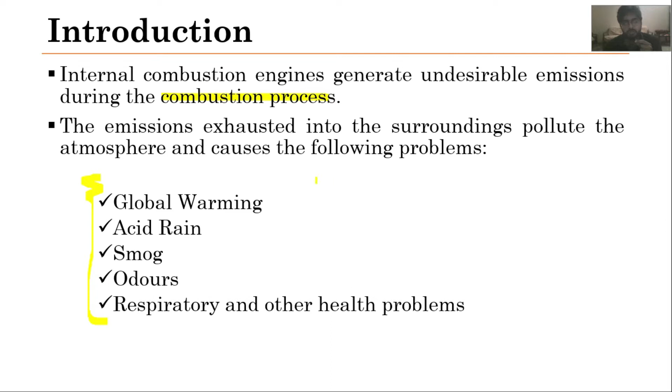So in the last video, we studied why these emissions are being produced, and that they result from the combustion process and are then exhausted into the atmosphere, which pollutes our environment. We also discussed some of the causes and effects of these exhaust gases, and some major causes of these emissions, such as non-stoichiometric combustion and dissociation of nitrogen, as well as impurities in the fuel and air.

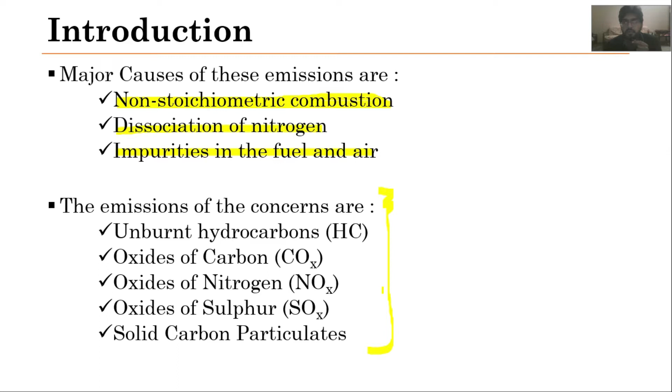After that, we studied what type of emissions basically occur during the combustion process. Then we also discussed what we should do regarding the control of such emissions. We discussed that either we after-treat our exhaust gases, or we reduce the generation of emissions in the cylinder.

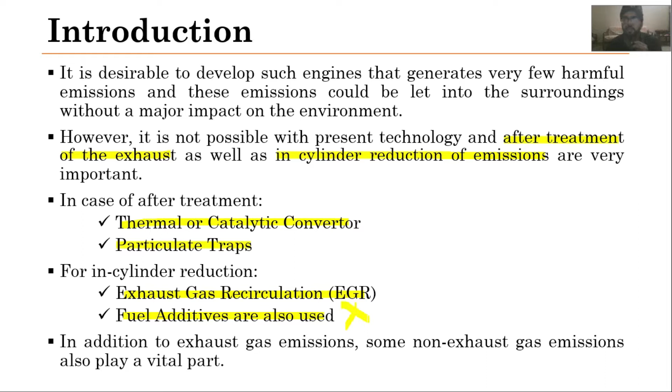We also discussed that for after-treatment we can use thermal and catalytic converters and particulate traps, and for in-cylinder reduction of emissions we can use an exhaust gas recirculation system, along with some fuel additives for that purpose. I also mentioned that we are not concerned with the fuel additives employed to reduce the generation of emissions. Then we discussed some of the basic history of air pollution due to the IC engine.

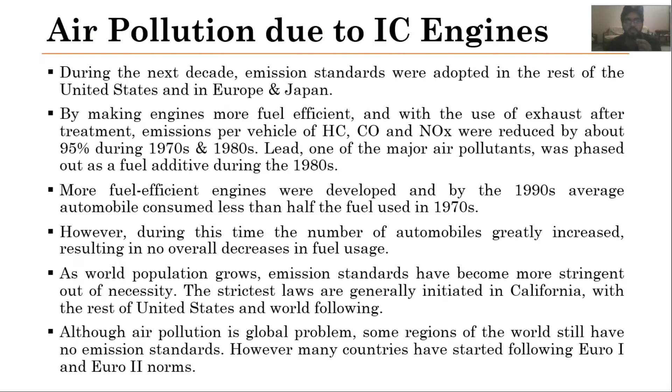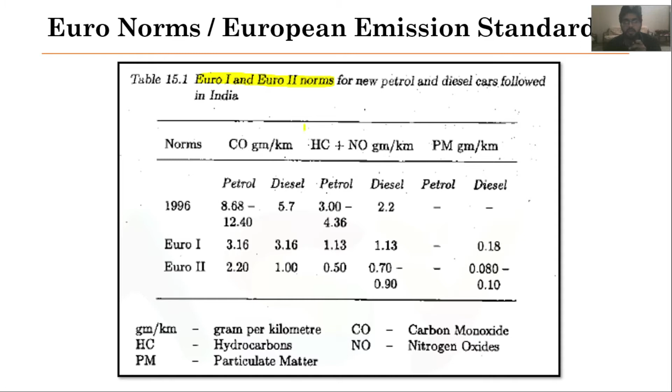After that, we also discussed the Euro norms and European standards, and went through the Euro 1 and Euro 2 norm graphs.

After that we discussed the classifications of engine emissions, and we classified our emissions into two categories: first is exhaust emission, and second is non-exhaust emission. Exhaust emissions are those like unburned hydrocarbon, oxides of carbon, sulfur and nitrogen, and some particulate, soot and smoke, while non-exhaust emissions are like fuel tank, carburetor, and crankcase blow-by losses.

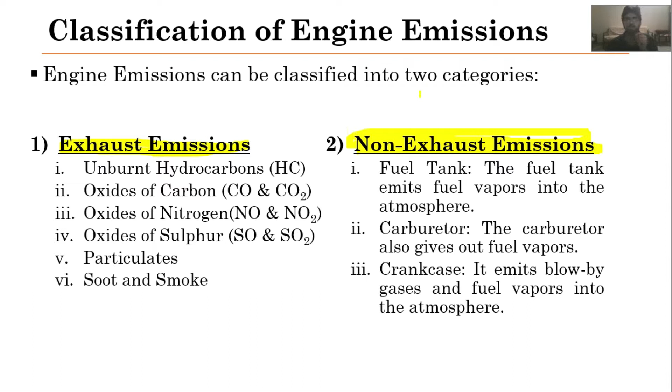Then we briefly discussed a graph between the equivalence ratio, the fuel-air equivalence ratio, and the amount of emissions produced during the combustion process. This graph is basically for the SI engine.

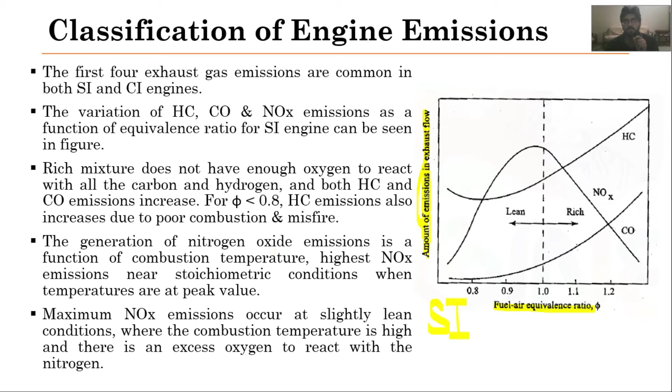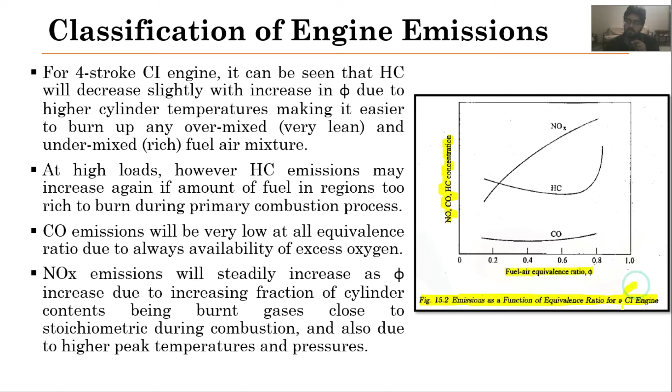Then at the end of the previous video, we discussed in quite some detail some of the causes because of which hydrocarbon emissions are generated in SI engines, and these causes were incomplete combustion, crevice volumes, leakage past the exhaust valve, valve overlap, and deposits on walls. At the end we also discussed oil on the combustion chamber walls. We discussed these causes quite briefly in the last video.

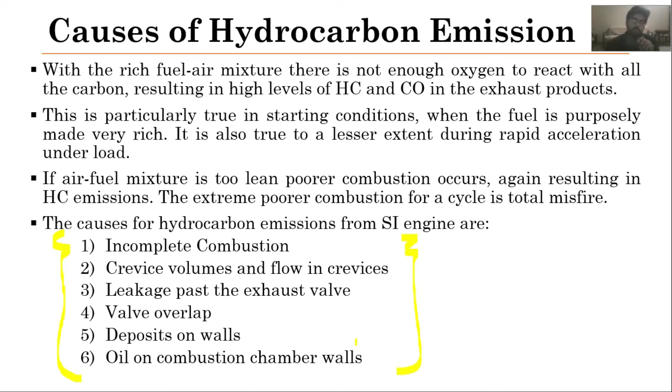So now moving forward towards today's topic, we will start off with hydrocarbon emission, with the causes of hydrocarbon emission, but this time in a two-stroke engine.

As I discussed earlier, in a two-stroke engine scavenging is done with the help of the deflectors present on the crown of the piston. During the scavenging process, when the fresh air-fuel mixture comes into the combustion chamber, it pushes the exhaust gases towards the exhaust port and pushes those gases out. Not only that, but during this process some of the fresh air-fuel mixture also goes out through this exhaust port, and this is a pure loss of hydrocarbons.

Such is one of the main reasons hydrocarbon emissions in two-stroke engines occur. The intake air-fuel mixture is used to push the exhaust residual out of the open exhaust port, which is called scavenging. So when this is done, some of the fresh air-fuel mixture along with the exhaust gases is expelled out of the cylinder before the exhaust port closes. This is the major source of hydrocarbon emissions in the exhaust.

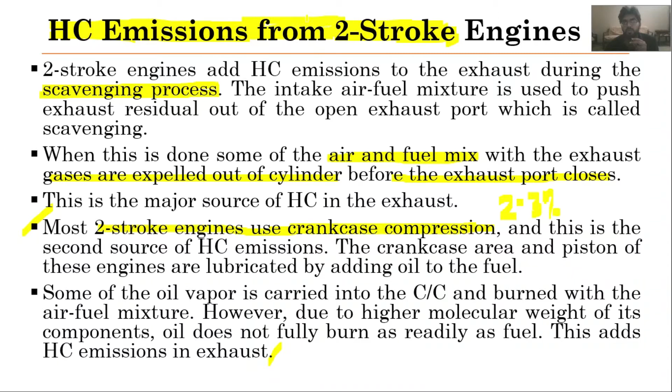Next we have the hydrocarbon emissions in CI engines. In the last video we started off with hydrocarbon emissions in SI engines, then today we discussed hydrocarbon emissions in two-stroke engines. Now we will start off with hydrocarbon emissions in CI engines.

In CI engines, we only send air in the intake during the intake process, and because of that, only intake air is being compressed. Since only intake air is compressed, high compression ratios are used in CI engines. When the fuel is injected, we usually have a very lean air fuel equivalence ratio, and because of this lean equivalence ratio, the production of hydrocarbon emissions is almost 1/5 of the emissions produced in an SI engine, because in SI engines the air fuel mixture is sent into the combustion chamber for compression.

The components in diesel fuel have higher molecular weights compared to gasoline, and this results in higher boiling and condensing temperatures as well. Because of these higher condensing temperatures, soot formation is more in CI engines.

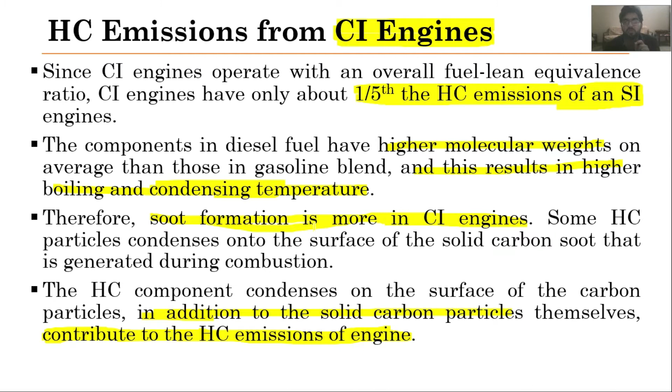So soot formation is not only the formation of carbon as a pollutant itself, but it is also contributing to hydrocarbon emissions as well. This is what usually happens in CI engines. Moreover, CI engines usually have combustion efficiencies of about 98%, meaning only 2% of the hydrocarbon fuel is emitted, which is quite low.

So it is important that injectors are constructed in such a way that the injection stops such that there is no dribbling, as we discussed in the chapter on mechanical injection systems—that there should be no dribbling in the fuel injection nozzles.

However, some amount of liquid fuel usually traps inside the tip of the nozzle, and when the piston is moving downward and a suction pressure is generated inside the combustion chamber, that fuel from the nozzle is driven into the combustion chamber, which causes an increase in hydrocarbon emissions. That volume of fuel is called sac volume—the amount of fuel present after fuel injection, trapped inside the fuel nozzle tip. It is a very small amount, but it increases hydrocarbon emissions.

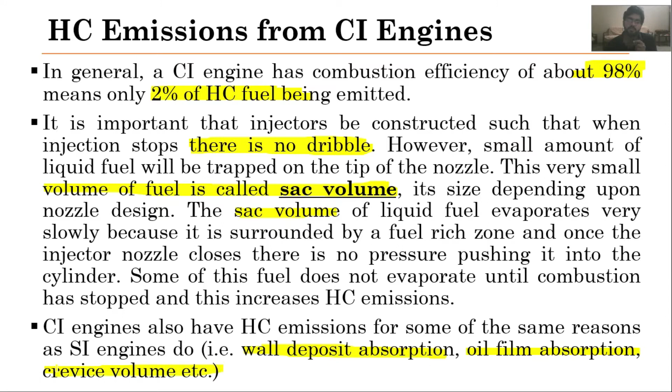Now moving forward, we will discuss some of the types of emissions which are being generated, starting off with the formation of carbon monoxide.

Carbon monoxide is basically a colorless and odorless gas, but it is poisonous. If a human being inhales it, it will react with the oxygen taken in during respiration, and it will not allow the necessary reactions required inside our body, because that oxygen is being consumed by carbon monoxide. So it is quite harmful from the human health point of view.

Typically, emissions of an SI engine consist of 0.2 to 5% carbon monoxide. So it is an undesirable emission, and we do not want this. Not only is it undesirable, it is also a loss of chemical energy, because we can convert this carbon monoxide into carbon dioxide and get heat which can be utilized in doing some useful work. So it is also a loss of energy.

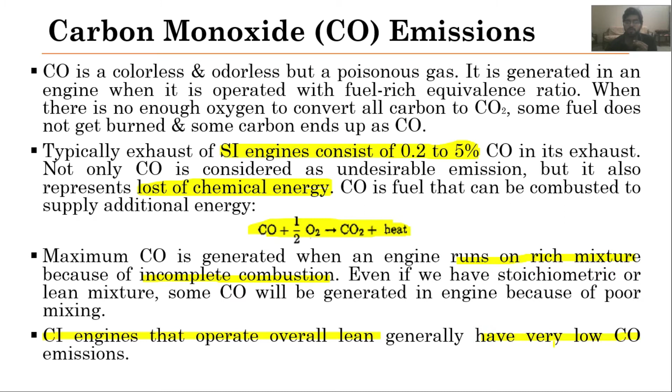Since CI engines usually operate in overall lean conditions, they have very low carbon monoxide emissions.

Now when we talk about nitrogen oxide emissions, as I mentioned earlier, nitrogen oxide emissions occur when we achieve the maximum flame temperature, when the cylinder temperatures are quite high. An exhaust gas of an engine can have up to about 2000 ppm of nitrogen oxides, most of that being nitrogen monoxide, but there can be some amount of nitrogen dioxide as well.

So NOx emissions are basically undesirable, and as I mentioned earlier, they can cause acidic rain. Not only that, but they can lead to the formation of smog and will lead to damage of the ozone layer as well.

At low temperatures, atmospheric nitrogen exists as a stable N2 molecule, and it will not form nitrogen oxides. But when we have very high temperatures inside the cylinder, this nitrogen molecule will break and oxides will be formed. So these pollutants are completely undesirable.

The highest concentration of nitrogen oxide is around the spark plug, where we usually have the highest temperature. And if we have the spark timing advanced, the cylinder temperatures will increase and more NOx will be produced.

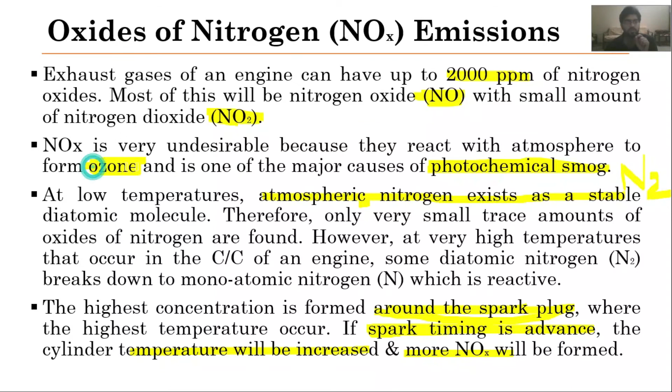Next we have photochemical smog. As I mentioned earlier, I will explain the formation of photochemical smog and how nitrogen basically affects the ozone layer. I will discuss this later.

So now I am going to start off that part - what happens in photochemical smog is that when sunlight, rays from sunlight, attack this nitrogen dioxide molecule, it provides the necessary activation energy to remove this monoatomic oxygen, and nitrogen oxide and smog will be produced.

And this monoatomic oxygen will react with oxygen molecules and it will produce ozone, it will form ozone.

Humans basically cannot survive, cannot inhale ozone, because it is a harmful gas at ground level and it can damage our biological tissues. Not only from the human's point of view, but it is also harmful for plants and trees as well. So we do not want the formation of ozone at ground level, but nitrogen dioxide causes the formation of ozone.

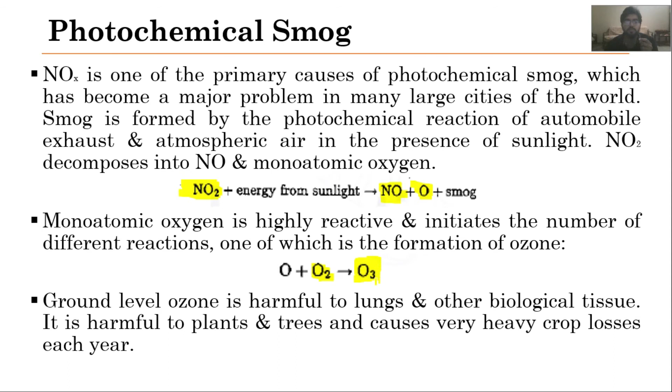Now moving forward, we have particulates. As I mentioned earlier, particulates are not a main pollutant in the SI engine, but in CI engines, since the exhaust of CI engine contains solid carbon soot particles which are generated particularly where we have a rich air fuel mixture zone.

Some of those particles are released into the atmosphere during the exhaust process, and they are undesirable and odorous pollutants. So maximum density of particulate emissions occur when fuel is injected to the maximum power, meaning we have a rich air fuel mixture or poor fuel economy. So soot particles are usually in the form of a cluster of solid carbon spheres.

These spheres usually have diameters ranging from 9 to 90, but most of them are within the range of 15 to 30. The spheres are solid carbons with hydrocarbons and traces of other components absorbed by the surfaces, meaning it will not only be the carbon, but it also contains some hydrocarbons with it, because the soot formation, the particulates which are being deposited on the wall, have absorbed some amount of the hydrocarbons.

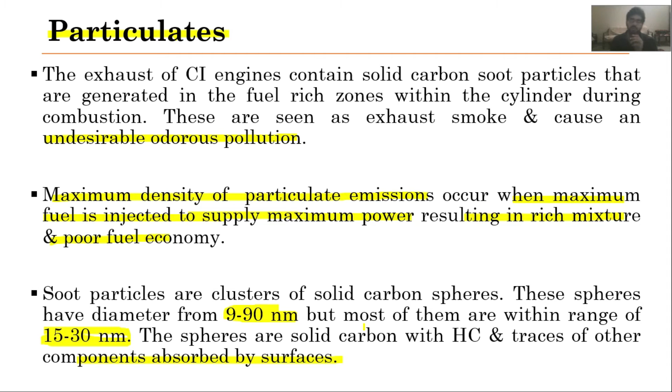Now next we have the formation of aldehydes. Aldehydes are the major emission problem particularly when we are talking about alcohol fuels. The formation of aldehydes is completely undesirable because it is an eye and respiratory irritant. This is a product of incomplete combustion, meaning when incomplete combustion in alcohols occurs, aldehydes are formed, and this is one of the major problems with the usage of alcohols as a fuel.

But since alcohols are not being used in that much amount as petrol or gasoline has been used, therefore such emissions are not a problem for now at least, but in future it may be a problem.

Now next we have lead. Long before, as I mentioned, a component known as tetraethyl lead was used for the increment of the octane number of the fuel, and this led to the release of lead into the atmosphere when combustion occurs.

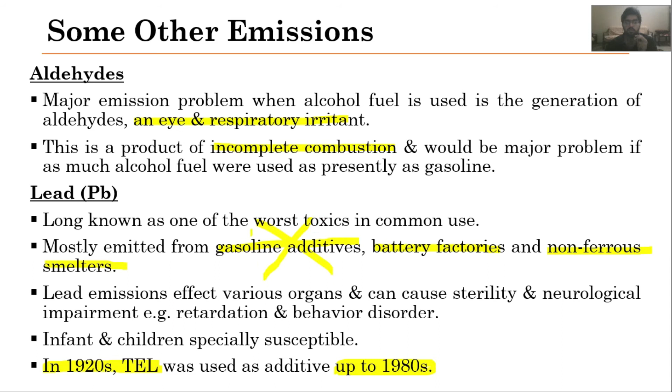Mostly emitted from gasoline additives, battery factories, and non-ferrous smelters. Now this has been removed because in gasoline it is not being used as an additive now.

So now moving forward, next we have the formation of sulfur oxides. As I mentioned earlier, the formation of sulfur oxide is one of the major reasons for acid rain, and gasoline contains about 150 to 550 ppm of sulfur by weight, but diesel fuel can contain up to

5500 ppm by weight. But in some developed countries this has been reduced to a tenth of this value, meaning only 550 ppm or maybe 300-400 ppm are being allowed.

So what happens at higher temperatures, sulfur combines with hydrogen as well, and it produces hydrogen sulfide. Again, this is a toxic gas, and when oxygen combines with sulfur, it produces sulfur dioxide.

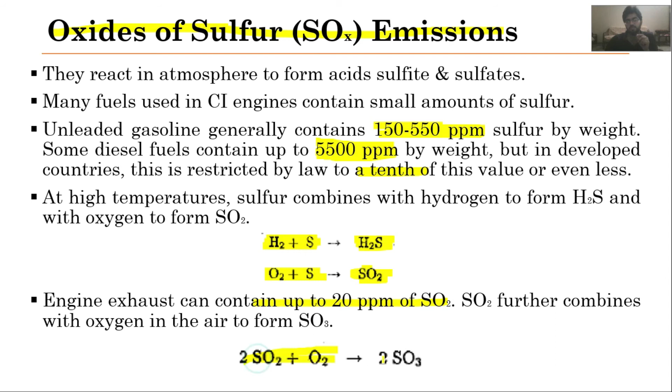Again, this causes the formation of acid rain. Now an engine exhaust can contain up to 20 ppm of sulfur dioxide, which then combines with oxygen to form sulfur trioxide, and when sulfur trioxide and sulfur dioxide combine with water vapors, sulfur trioxide forms sulfuric acid and causes acid rain.

And when sulfur dioxide combines, it produces sulfurous acid, and this is also another reason for acid rain as well. So sulfur is basically the main threat here, and a lot of work has been done recently to minimize the amount of sulfur from the fuel.

So in many countries, laws restricting the amount of sulfur allowed in the fuel are continuously being made more stringent. During the 1990s, the developed countries reduced the acceptable level of sulfur from 0.05 to 0.01 percent. The amount of sulfur in natural gas can range from little to large. This can be a major emission problem when natural gas is used in IC engines.

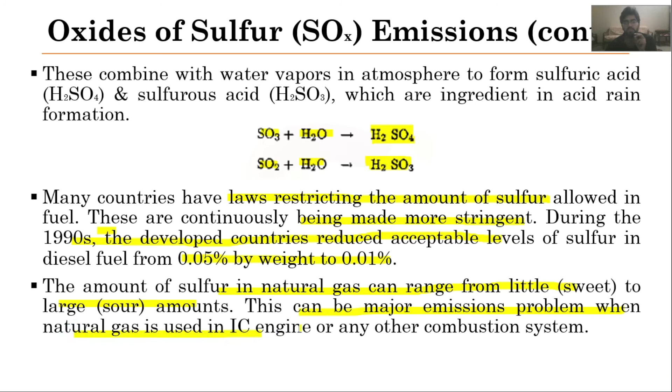Starting off with the methods to control emissions in the SI engine. As I mentioned earlier, we can use different methods like after-treatment of exhaust gases, and also improvement in fuel quality. Another approach is modification in engine design, which we'll discuss today. In the next video we'll cover exhaust gas treatment. We won't discuss fuel modification here since we're more concerned with IC engines, not the formation of fuels.

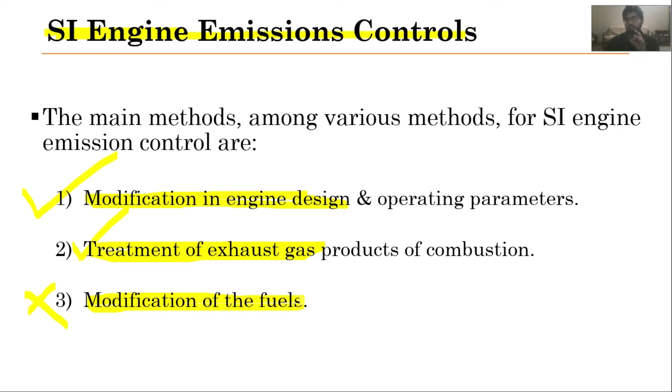Moving forward, the first modification in design is related to the combustion chamber configuration. We have to modify our combustion chamber to avoid flame quenching zones, meaning zones where we have incomplete combustion, which results in higher formation of hydrocarbon emissions. We can do this by reducing the surface to volume ratio and reducing the space around the piston rings.

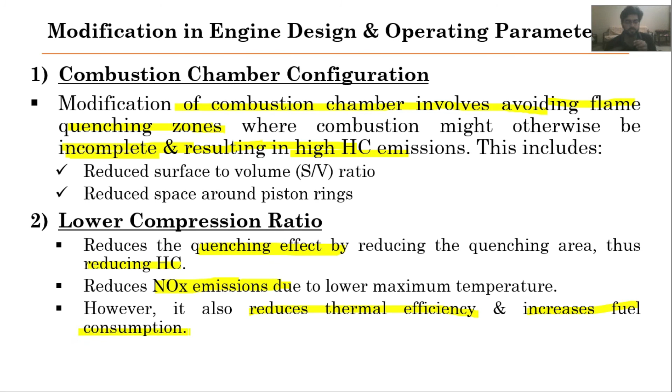Next we have the lower compression ratio. A lower compression ratio will reduce the quenching effect, and by reducing quenching areas, it will ultimately reduce hydrocarbon emissions. Since the compression ratio is reduced, maximum flame temperatures are reduced, therefore NOx emissions are also reduced. But it will cause a reduction in thermal efficiency and will also increase fuel consumption. So this is a disadvantage of using lower compression ratios.

Moving forward, next we have the modified induction system. As mentioned earlier, we might have issues in forming the air fuel mixture, particularly ensuring a uniform or homogeneous mixture, especially in a multi-cylinder engine where it can never be ensured that the same air fuel ratio is going into all cylinders. Therefore we have to modify our induction systems so they provide the desired same amount of air fuel mixture for all load and power requirements.

Next is ignition timing. When we have an advanced spark, we achieve maximum flame temperatures, and when maximum flame temperatures are achieved, formation of NOx increases a lot. This is one of the main reasons we cannot use too much advanced spark timing, otherwise NOx emissions will increase. So NOx emissions are reduced due to lowering of the maximum combustion temperature, which happens when we do not have an advanced spark, and NOx emissions will ultimately be reduced.

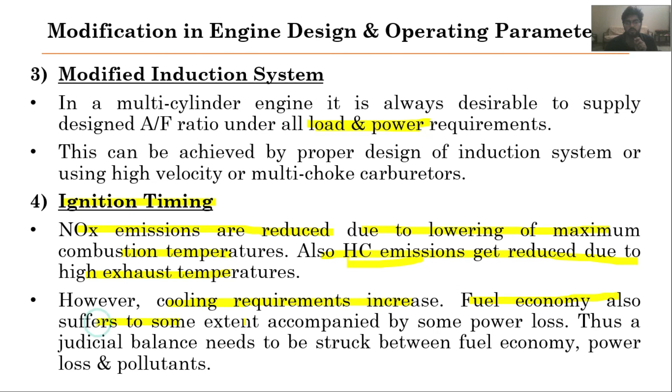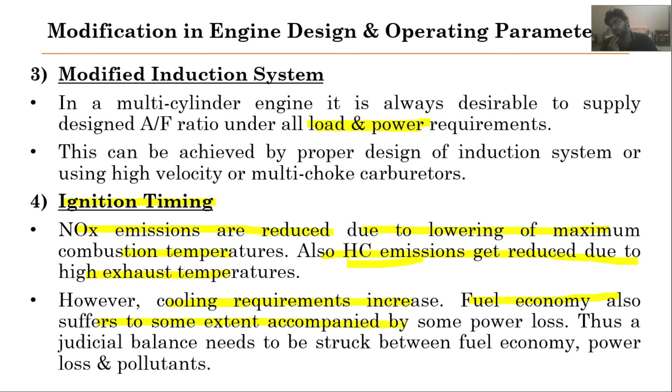Also, hydrocarbon emissions get reduced due to high exhaust temperatures. However, when we have a high exhaust temperature, cooling requirements will increase, fuel economy will suffer to an extent, and we will have some power losses as well. Therefore we have to balance this: we cannot have too much advanced spark because it increases NOx emissions, and we cannot have too much retarded spark condition, otherwise it will increase hydrocarbon emissions due to incomplete combustion. So we have to do a trade-off between them.

Next is reduced valve overlap time. In real engines there appears a condition when both the inlet valve and exhaust valve are open, and some of the fresh air fuel mixture coming into the combustion chamber is released into the atmosphere directly without being combusted. This has to be controlled and ensured that such conditions don't occur. For that purpose, new variable valve timing technology has been used, which controls the opening and closing of the valves so that valve overlap time is reduced to the minimum possible crank degree angles.